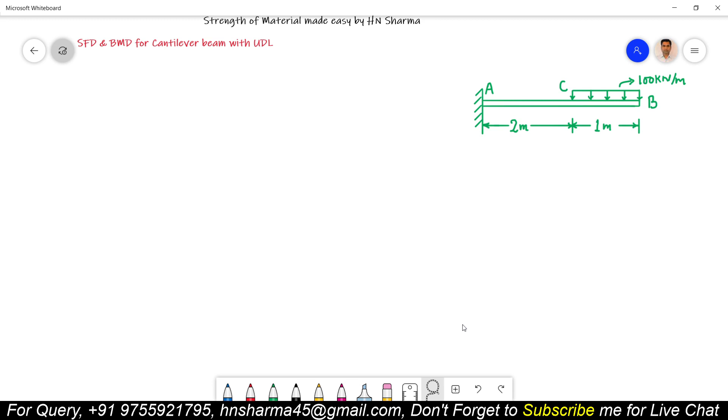So let me draw it. I have drawn the vertical lines from all the 3 points that are marked on the beam ABC. Now we will draw the free body diagram of this beam.

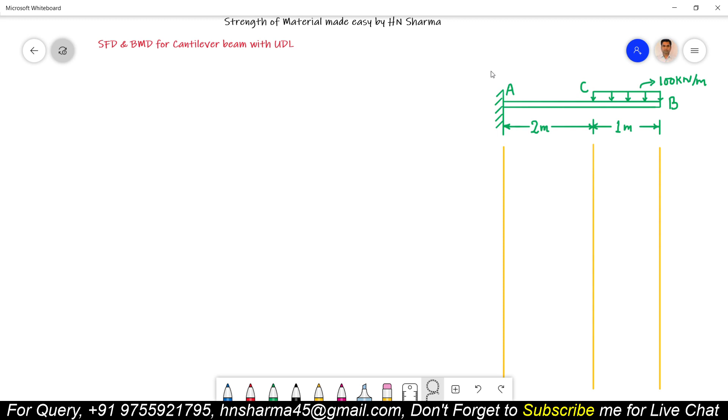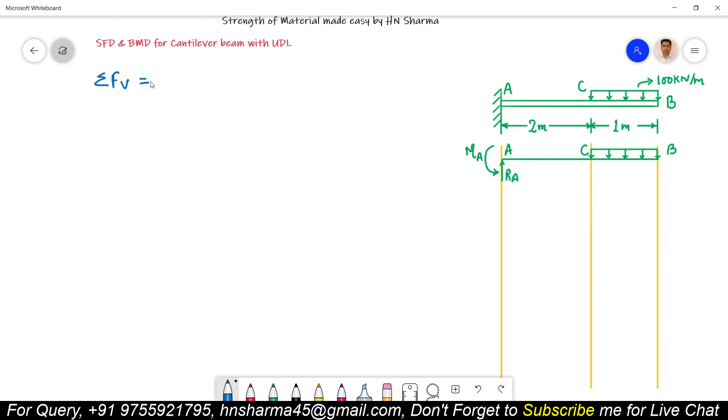For that we will use our 3 conditions of equilibrium and using the first one, that is sigma net vertical forces will be equal to 0, means RA acting vertically upwards इसलिए positive minus UDL that is 100 into 1 and no other force is acting, so it is equal to 0. So it implies that RA will be equal to 100 kilonewton.

Now using the third condition of equilibrium, that is sigma moment about any point on the beam will be equal to 0. तो मैं यहाँ पे लेता हूँ net moment about the point A. So taking moment about the point A, तो सबसे पहले तो एक moment act कर रहा है, that is MA. It is acting in the anti-clockwise direction, इसलिए मैं इसे negative लूँगा, minus MA.

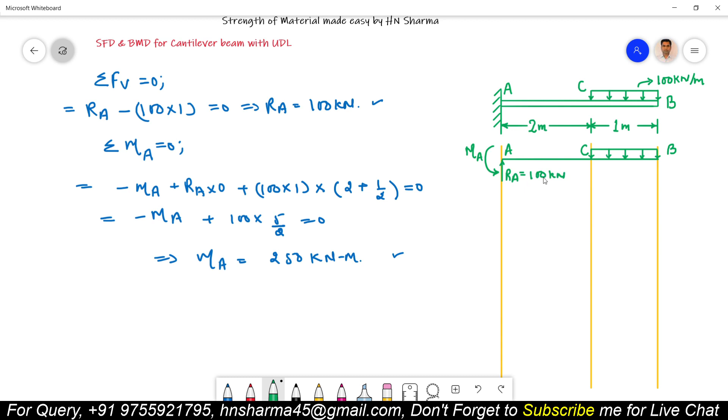Okay, so हमें यहाँ पर RA and MA दोनों की values मिल गई. So we will put the values here in the FBD. So let me write RA is equal to 100 kilonewton and MA is equal to 250 kilonewton meter.

So now we will draw the shear force and bending moment diagram. तो shear force और bending moment diagram बनाने के लिए I will mark 2 reference lines. So let me mark the lines. So मैंने 2 reference lines draw कर ली. The first one is for shear force diagram SFD and second one is for bending moment diagram BMD.

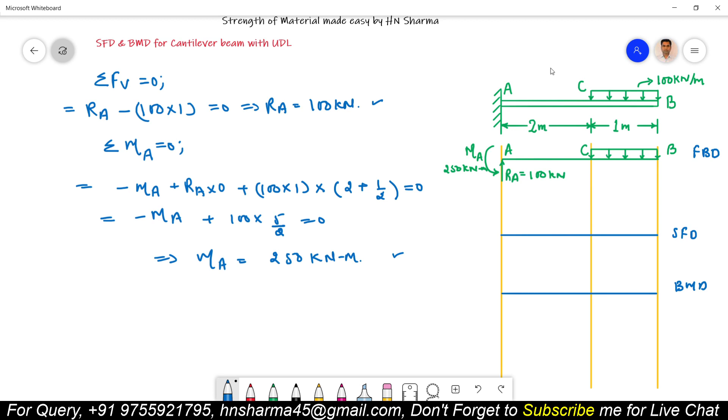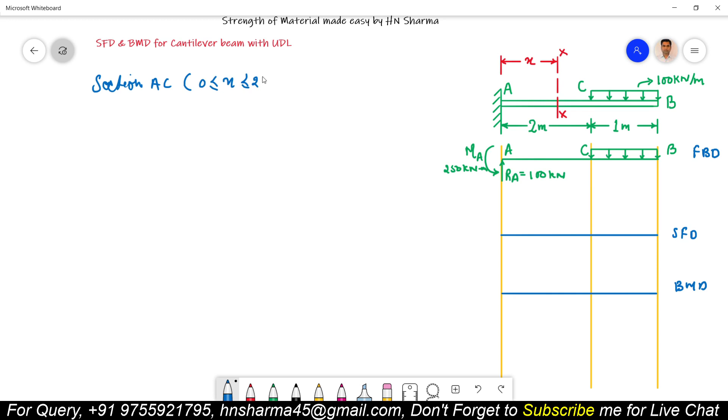तो मैंने इसी सेक्शन में एक पॉइंट मार्क किया x and it is lying at a distance of x from the point A. So now considering the section AC, जहाँ पर x की वैल्यू वेरी करेगी 0 ≤ x ≤ 2, means from the point A to the point C. So now first of all shear force. So shear force about the point x will be equal to left side के सारे forces consider करेंगे, RA that is 100 kilonewton acting vertically upward and no other forces acting. So this will be 100 kilonewtons.

And this value is independent of x, means इसका मतलब है shear force at the point A जहाँ पर x की वैल्यू है 0 will be equal to 100 kilonewton and shear force at the point C जहाँ पर x की वैल्यू है 2 will again be 100 kilonewton. So मुझे A और C दोनों पॉइंट पे shear force की वैल्यू मिल गई. So I will take the suitable scale and I will mark these points. So this is 100, means यहाँ पर मैं 100 पॉइंट्स ऊपर चलूँगा. This is the 100 kilonewton point. So let me mark this 100 kilonewton and 100 kilonewton.

So reference line से मैं सबसे पहले 0 से 100 की तरफ vertical line draw करूँगा and from 100 to 100 I will draw a horizontal line. So I have drawn these lines and this is the shear force diagram for the section AC. Now come for the bending moment diagram for the section AC. Moment about the point X will be equal to minus MA since it is acting in the anti-clockwise direction plus RA into x, because RA will give a clockwise moment about the point X and no other force is acting. So this is minus 250 plus 100x. This is, let us say, equation number 1.

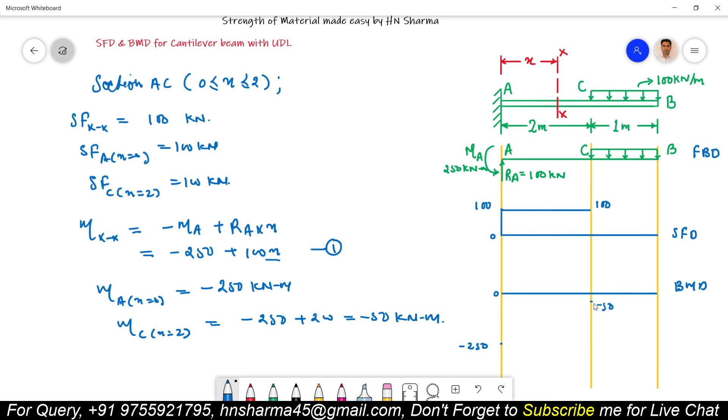Let me mark the sign also. So now I will draw the line. मैं 0 से नीचे minus 250 की तरफ vertical line draw करूँगा and then from minus 250 से minus 50. Since the degree of x is 1 in equation number 1, so minus 250 point से minus 50 point तक जाएगा straight line. So this is the bending moment diagram for the section AC.

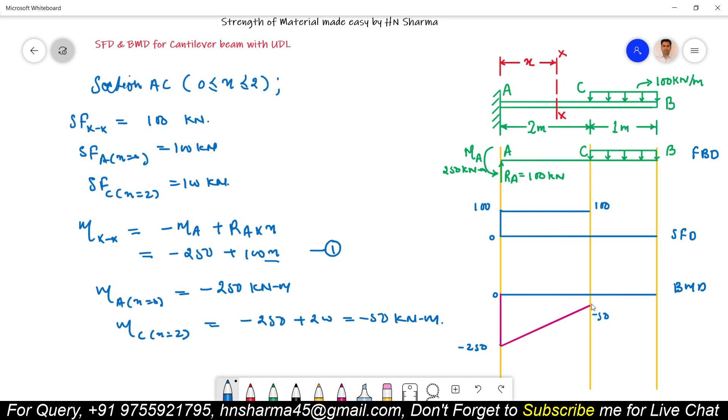Now let us come for the section CB. So now I will mark a point in section CB. Section CB में मैं अब एक point mark करूँगा जो कि A point से x distance पे lie करेगा. So मैंने CB section में एक point mark कर दिया x and it is lying at a distance of x from the point A. So now considering the section CB.

Section CB. Here the value of x will be 2 is less than equal to x is less than equal to 3, means it will vary from the point C to the point B. So now shear force about the point XX will be equal to 100 acting vertically upwards minus.

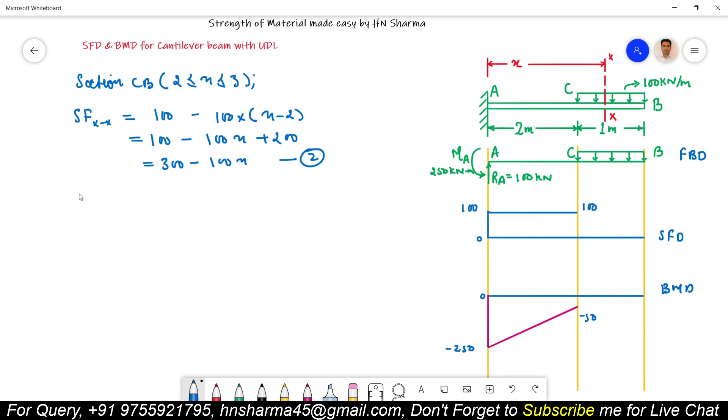So now the shear force at the point C, where x equal to 2, will be equal to 300 minus 200, this will be 100 kilonewton. And shear force at the point B, where x equal to 3, will be equal to 0 kilonewton.

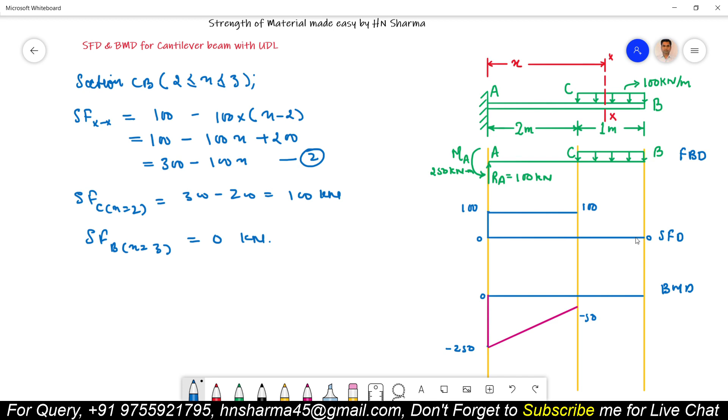So let me draw the line. So I drew this line. Now with this the shear force diagram for the given beam is complete. Now come for the bending moment diagram for the section CB.